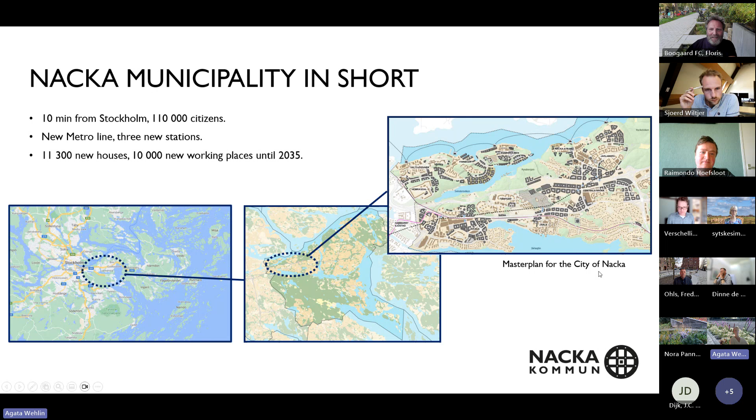And part of an agreement that the municipality made with the government was that we have to create many new houses and many new working places until 2035. And like I say, Nacka is surrounded by water. As you can see, we have over 40 lakes. And of course, we try to work with the stormwater in a sustainable way. And we have some stormwater guidelines that we are following in all our projects. In those guidelines we have both guidelines and examples for how you can manage stormwater on private properties and in public spaces. We also give clear dimensioning standards that need to be followed to secure both water quality and runoff.

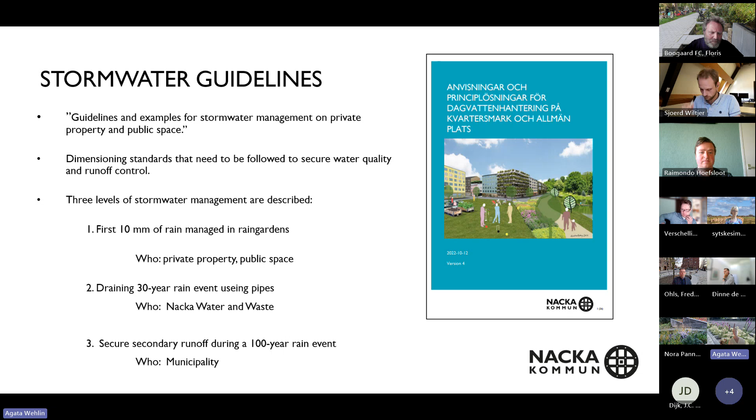And we describe 3 different levels of stormwater management, where the first level is that everybody has to handle the first 10 millimeters of every rain event through using rain gardens. Then we have the piping systems, where the utility service company has to secure 30-year rain event runoff. And then the third level, the municipality is responsible for securing secondary runoff during up to a 100-year rain event. And these guidelines are mainly used in new developments or larger reconstruction projects. So we don't have the same guidelines when it comes to existing areas and existing developments.

And when we integrate blue and green infrastructure, we dimension them to manage the first 10 millimeters of rain, and that can be compared with an average Swedish rain that is 7.3 millimeters, which means that we can treat 75% of the yearly runoff.

And as I mentioned earlier, this has to be followed both within public space and on private property. So we are following up the developers, and we are a part during the design process of public spaces. So we are there and active in securing that those guidelines are reached.

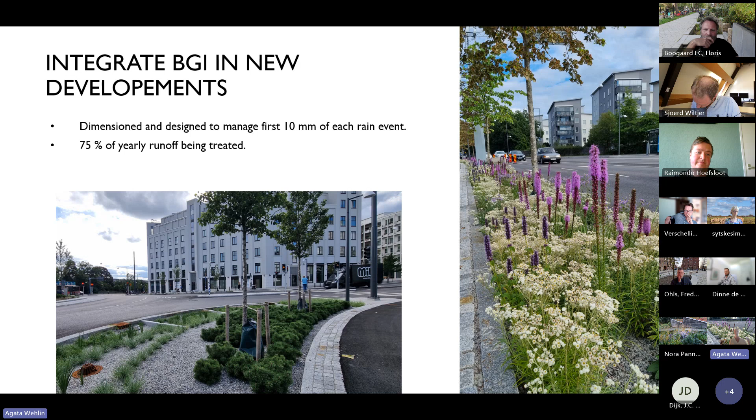And during the last years, we have tried to develop 2 types of rain beds. The first example is those open rainbeds where the detention volume has to be able to be stored on top of the substrate, on top of the soil. So we don't calculate the volume that is available in the soil and the substrate.

So we have tried to make it easy for the consultants to make the calcs, like, you have the catchment area, the runoff coefficient, and you take that times 10 millimeters, and then you have a volume on top. So we have really tried to make it simple. And the second one is this grid-covered rainbed, where we have the detention volume under the grid here. So those are quite deep, and below we have a sand filter.

And what we have also tried to do in those larger redevelopment projects where we have very high traffic intensity is to separate the water from the sidewalk and bike path. This water is drained into these airing wells, into a structural soil that surrounds every tree. So there is about 20 cubic meters of structural soil. And the structural soil consists of macadam, quite large fractions, that are mixed with the soil.

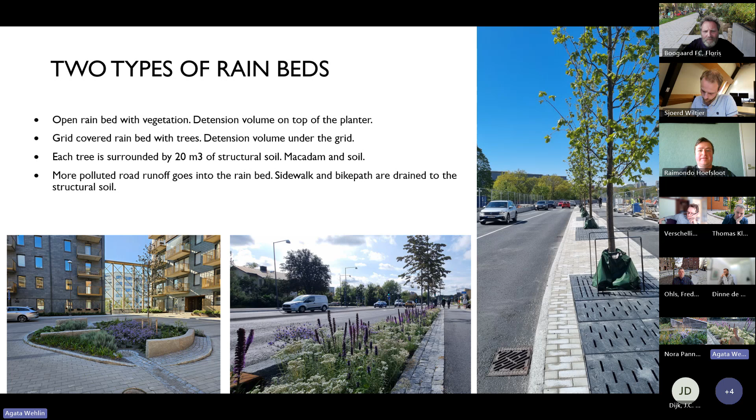And when it comes to rain gardens, we have noticed that there are many different aspects that have to be considered, and we are having different demands in each project. The inlets look different in more or less all the projects because sometimes the road has a high slope, sometimes it's flat, sometimes we can make the inlet wide, sometimes it has to be narrow for different reasons.

It also can be difficult to actually secure the 10 millimeters on the top of the planter when we don't have enough space in a quite narrow road section. We have realized that there are many different substrates and soils on the market, and they have different characteristics that bring other issues when it comes to choosing vegetation or infiltration rate or things like that.

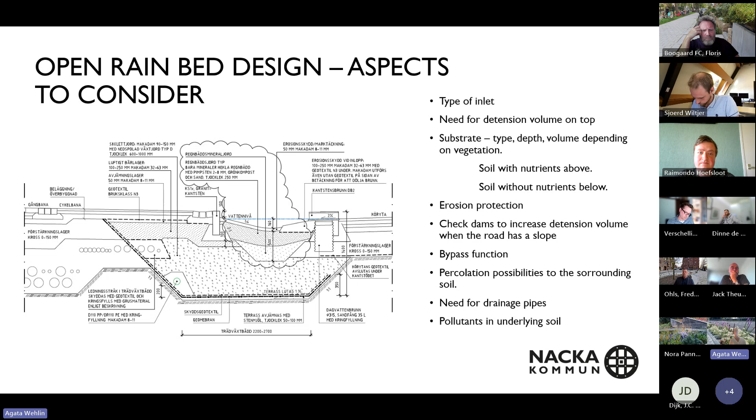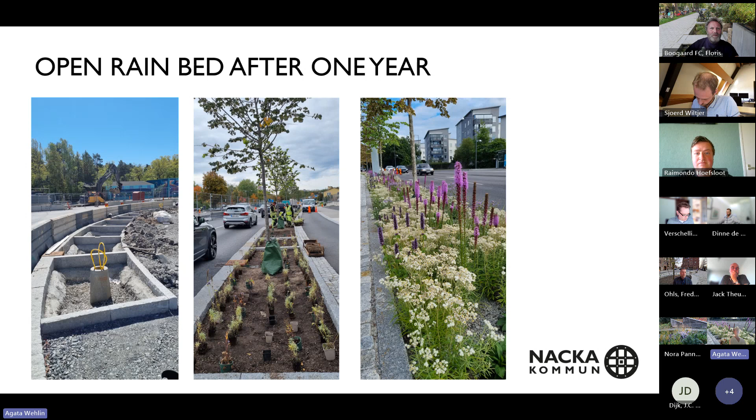And this is how a progress can look like from construction stage through planting and until we get a fully grown facility. And this is one of our main roads through Nacka with very high traffic intensity. And here you have a section of the grid-covered rainbeds.

Here you can see that there is quite a good volume available because the sand filter is quite low, and we have covered it with the grids so you can't see the sediment or rubbish and stuff that is being drained here compared to the open rainbeds. We can see the airing well where we drain the sidewalk and bike path, and the water is drained out to the surrounding structural soil.

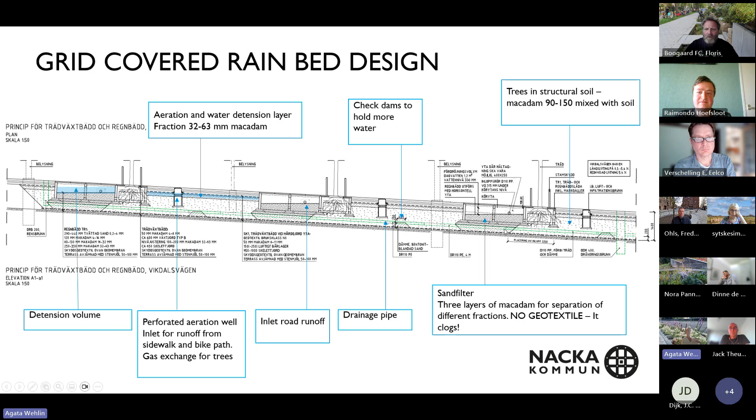You can see the inlet over here. In this project, we had drainage pipes. We had check dams on the bottom of the structural soil because it was quite a slopey road. And then we have this sand filter lying on a couple of layers of macadam that can easily be switched.

And this is how the grid covered rain bed looks. So we have the tree placed on one of the sides, and that is because we need this whole detention volume in this box. And then we have those openings so the roots from the trees can go out to the surrounding soil.

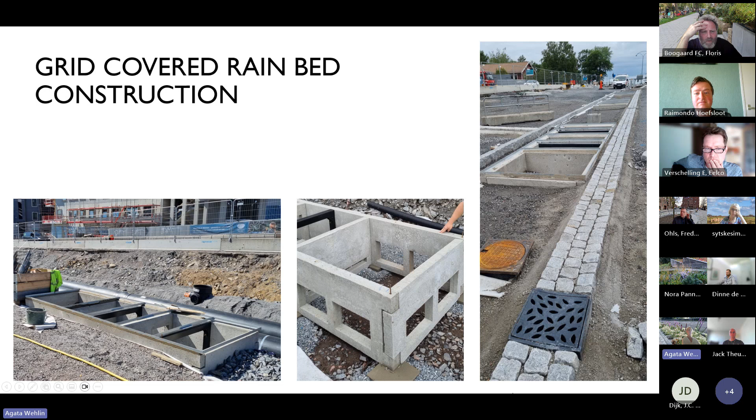And here are some examples that we have built. A comparison between those two is that here is one of our first projects. As you can see, we don't have the tree at road level. The tree is below, so that we get the detention volume, and as you can see, the crown is very low, and we wish to lift the crown up. So the result became that we put the tree on one of the ends of the rain bed.

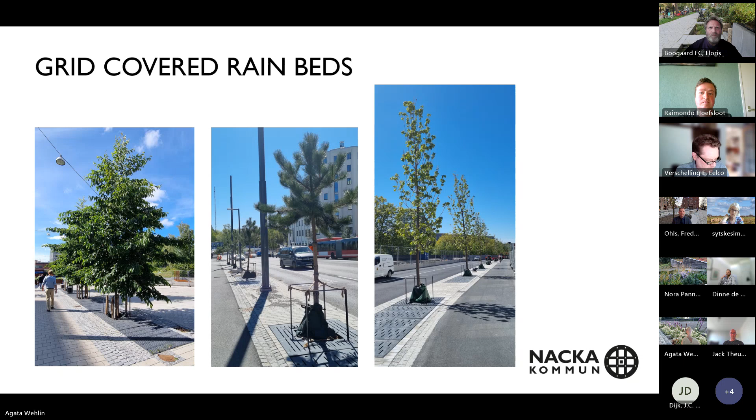So we have also done a journey during the last 5-6 years to develop those and create those better adapted for our needs. And we think that the grid covered rain beds are our favorite so far when it comes to urban design aspects, like we want people to be able to move across the furniture zone without stepping on vegetation. And we call this section the furnishing or furniture zone, and that's because we also have benches and bike parkings and other things.

And another benefit with those grid covered rain beds is that they can be made much deeper than the open ones, so we can store a larger amount of volume, which can be difficult to achieve when we have a very narrow nature zone, and we have many other functions that need space, like pipes, racks, benches, road signs, lighting.

Yeah. We have also noticed that those are much more salt resistant than the open rain beds, where we can see some damages. And our operation and maintenance personnel also really loves them because they can put the snow in the furniture zone. That was a hard word, sorry. And there is no need for lifting out the snow and transporting it to another place. It can lay down here during the whole season and drain down to the rain beds.

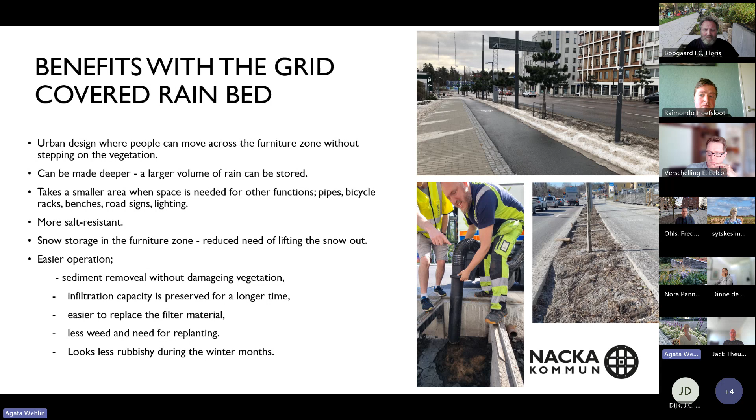And every year we have a very nice operation and maintenance event with our personnel in Nacka. And this is because we want to create engagement around rain gardens and spread knowledge. During those events, we measure the growth of the sediment. We also do the infiltration tests, and then we also remove the sediment and take sediment samples for analysis. And this is because this technique is new for us. We don't have a lot of experience from it, so we are trying to collect data to better understand how they are working and what we have to think about to make them work in the long term.

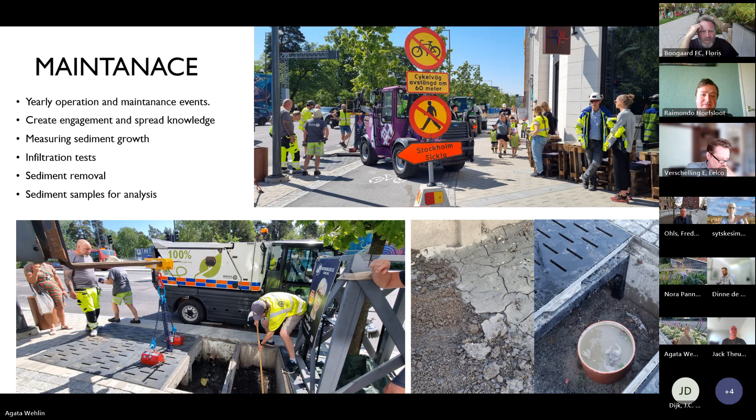And here we can see how the salt has affected the open rain beds during the winter. Near the curb here, you can see the vegetation that has been planted has died. There have actually been some natural seeds being rooted here that have started growing. So it will be interesting to see what can actually grow here.

What we also can see is that the trees are doing very well during the spring, but during the late summer, you can see damages on the leaves, which we cannot in the grid-covered rain beds. So that is something we are discussing in-house. Do we have to use such a large amount of salt for de-icing? Can we use another type of salt? Can we find other types of vegetation? Because those that were chosen for this facility are already plants that can live in dry conditions and that should be at least a little tolerant to salt.

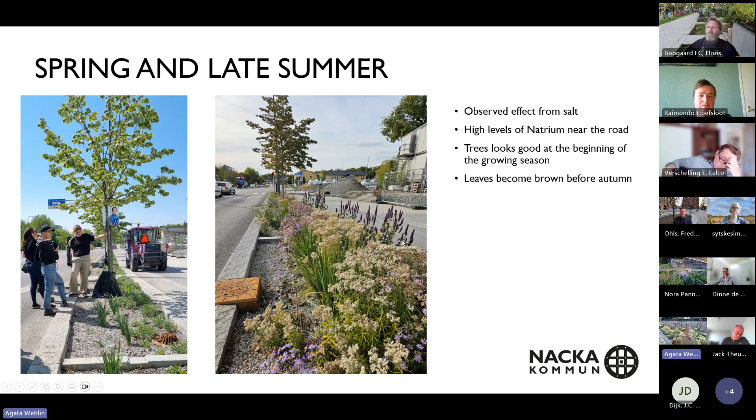So some short lessons learned. Designing rain beds can be very complicated, but it's also a lot of fun. You can be creative, work together with your colleagues, develop new details, I would say. In an urban environment, there also has to be many different interests weighted together. So it's not like I'm getting my whole wish list during the design process, but together with the other areas of technologies, we try to find the best solution in a bigger and holistic perspective, I would say.

You really have to have a multidisciplinary approach, close collaboration and communication between landscape architects, traffic planners, constructors, lighting engineers, and so on. You need to collaborate from early planning through the whole detailed design process. Also, an understanding of blue and green infrastructure and why we build them is crucial for effective and long-term successful maintenance. So engage your operation and maintenance personnel.

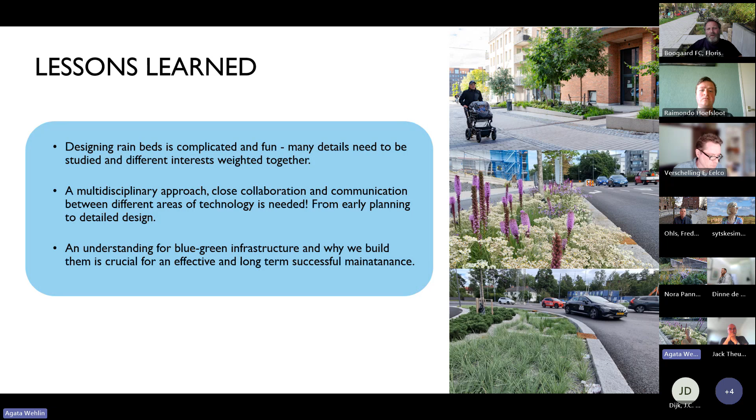Thank you. I will stop here.

Thanks a lot, that was great, especially getting into the challenges, and that's great for the Q&A afterwards. So now we go to Frederik, but maybe in between there were some questions in the chat. Shall we just do one? As agreed, we're going to do most of the questions afterwards, but maybe the macadam question from Jennifer.

What kind of substrate is it actually? Macadam is just bedrock that has been crushed. It has a fraction between 90 to 150 millimeters. We put the macadam in, first one layer of macadam, then we put soil that we flush with water so it fills out the gaps between the macadam, then we put another layer of macadam and soil and drain it down. That type of construction is very stable because it's like a road body, so you can drive with heavy traffic on it, which means the soil is not compacted and the roots can develop well.

Yes, thank you. Let's see how this works. First share screen and then... And then, yeah, we get your email now. Maybe. Good. Oh, now you have two pictures, right? Yeah, exactly. Okay, let's see. We could do it like that, but yeah. Bye, Eelco. I can do it also better like this. Okay, now? Looks good.

Perfect, looks good. Yes, I'm Fredrik Ohls, working at Sweco, a consultant company. I worked with Agata before, we were colleagues. I work with stormwater cleaning and climate adaptation, mostly detail design now, because I realized I'm going to retire in 15 years, so I need to do some real projects now, not only investigating. So I'm focusing on detail design, and half my time I'm also a local politician. I never thought that before, but I got into politics, and I am now vice mayor of a municipality suburb of Stockholm. It's a very odd combination, but it's very nice. I try to implement it the political way too.

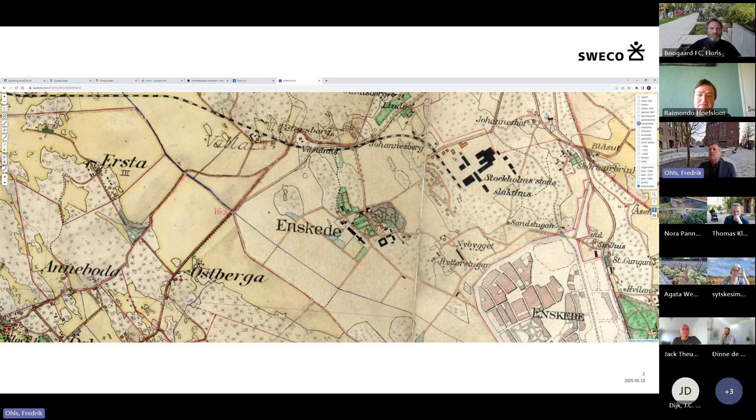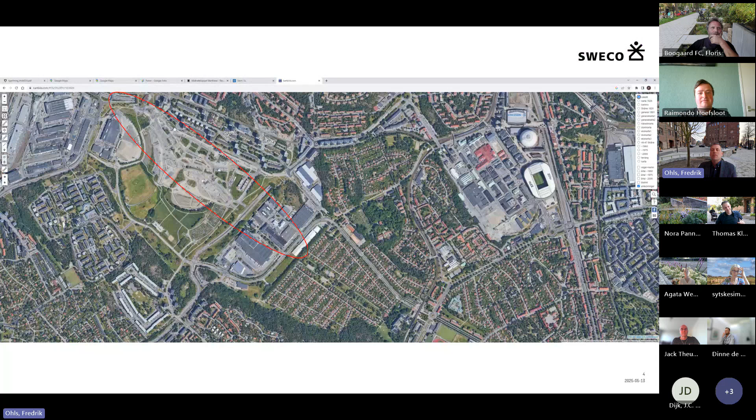Well, let's see the next picture. I work in Stockholm mostly with my projects, and this is how it worked before. It was nice for the water just going into the blue ditch, you can see it here. Then we started to develop Stockholm, and the blue ditch is still there in the red circle, but we forgot how the water flows, so we just put it into pipes. That's the problem, so now we are lifting the water back up. I just wanted to show you that to remember what we are doing. This is the Royal Seaport, a rainbed project in Stockholm. I'm going to show you a lot of pictures from different projects in Stockholm, mostly involving Sweco, but also some others.

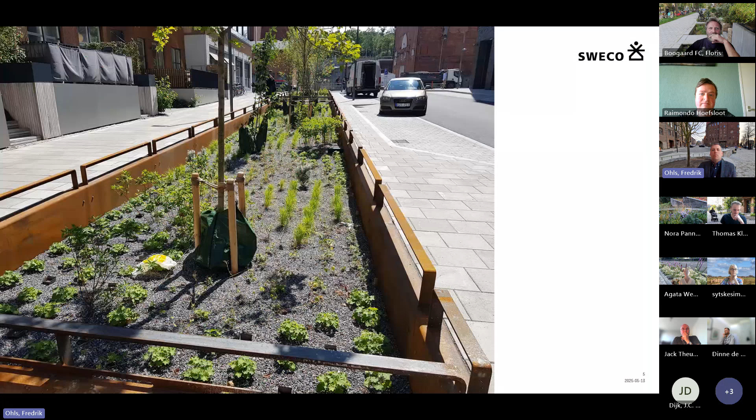This is full with macadam. And the recipe that's used until now in Stockholm is 70% macadam or sand, 15% biochar as a carbon, and 15% compost or some humus. That's the soil that can breathe and can receive water.

And we also often have a lining in the bottom. Before it was to protect from the soil that is polluted, but now it's to store the water because there's a lot of dryness going on.

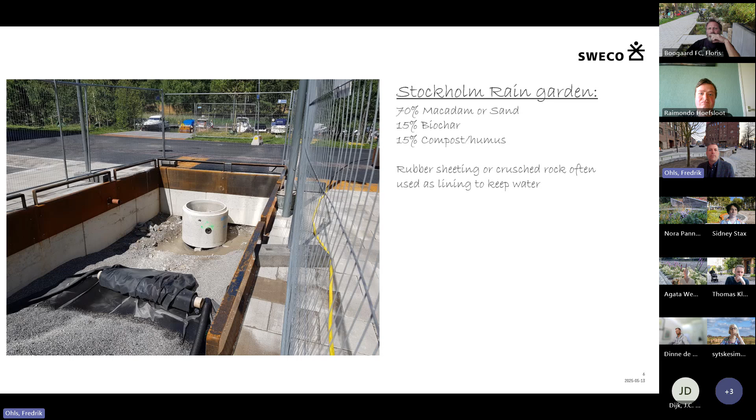And I have a film, maybe you've seen this on LinkedIn, some of you. I think Thomas has seen it. This is how it looks like after 50 millimeter rain. It's still working very fine.

In Stockholm, we have a design criteria of 20 millimeter. But I think it's the same as Nacka, because we can allow ourselves to have 10 millimeters slipping away, and then 10 millimeters can infiltrate. At least my calculations look like that. Sorry about that.

But this is another rain garden in Stockholm. I also have a film of that one. And it's very tricky, so it was slipping into the road body.

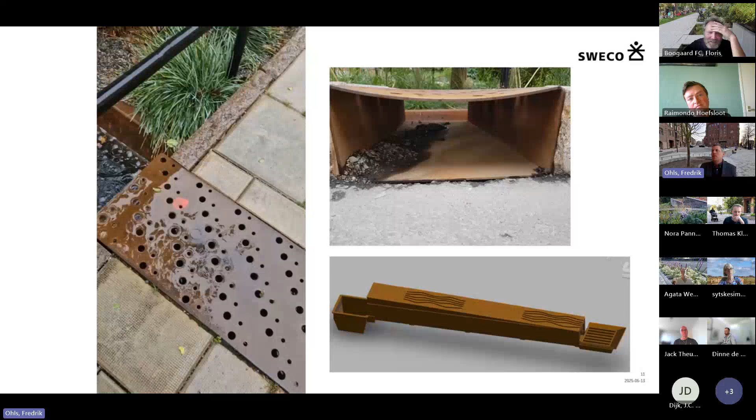So we developed the one at the new inlet. We are trying that now, on the bottom right, with a pattern that is the Stockholm official pattern of stormwater inlets, the waves. It's interesting - if it works, it will be a success, but if it doesn't work, we will find another pattern. I hope it works. This is on its way now to be implemented.

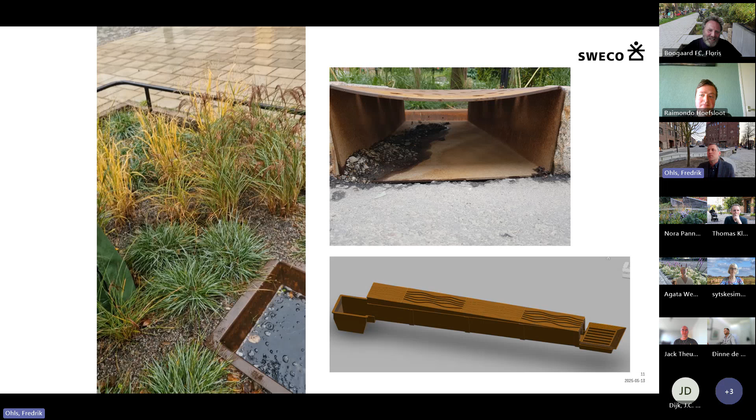And as Agata showed, this is the way Stockholm does it. We do the same as Nacka - we invented the wheel at the same time, I think. But we also have some people going from Nacka to Stockholm and vice versa. So this is the Stockholm way. The blue is the inlet underneath.

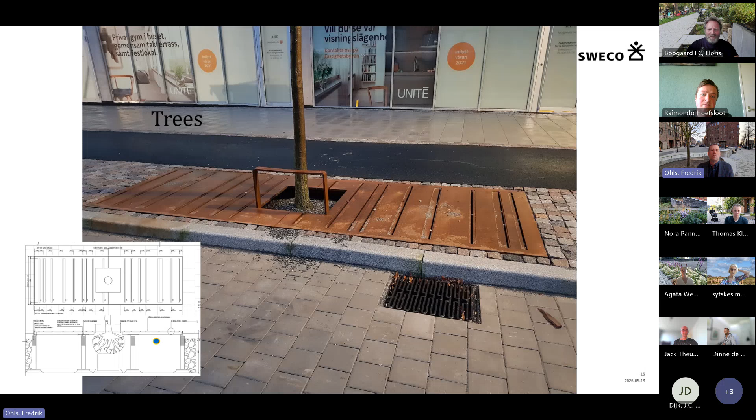And we also have this invention used in Stockholm: we have a lot of impermeable area, but we just make a hole to the macadam layer with a stone under the pavement, and then the water can enter here. It works really well and is implemented everywhere in the city.

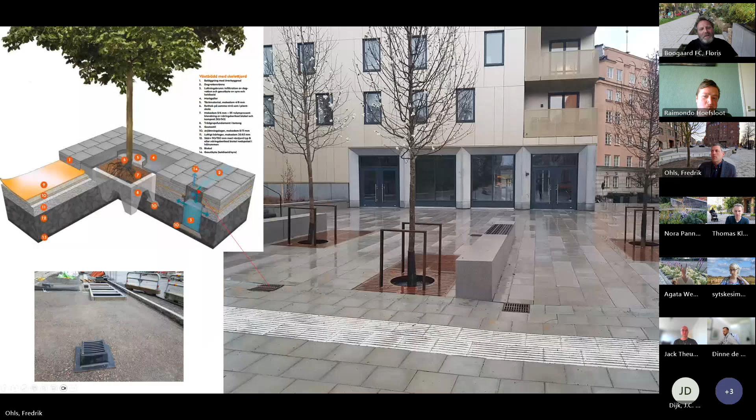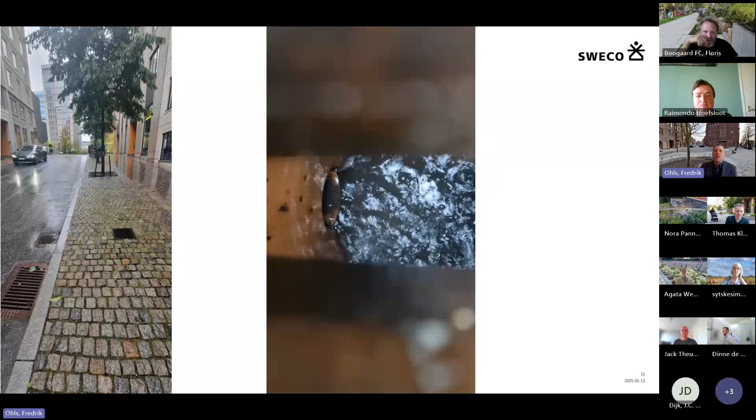And okay, I have another film of how it looks like when the water is coming in... This is how it works in Nacka, but this is in Stockholm - it's the same, it just goes through a pipe and comes out. This is very small, but it seems to work also with small boxes.

And you see, this is an inner city place in Stockholm. And we have another extra - this is for the trees, and this is for the pipe system. There's a redundancy.

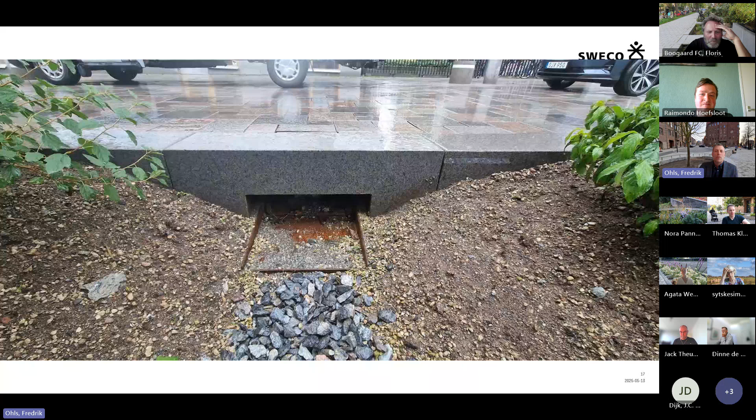And it also looks like this in the inner city of Stockholm now. We have parks that take a lot of stormwater using the slope to the park. A lot of invention of how to get the water - that's the tricky part, how to get the water into this and to get good cleaning.

And Thomas promised you no wadis, but I will show you a wadi. This is water in the Royal Seaport. Just to show how this macadam soil really infiltrates and filtrates very well, because here is the pipe outlet, but there was no water. This was 50 millimeter rain, and the Baltic Sea was then cleaned.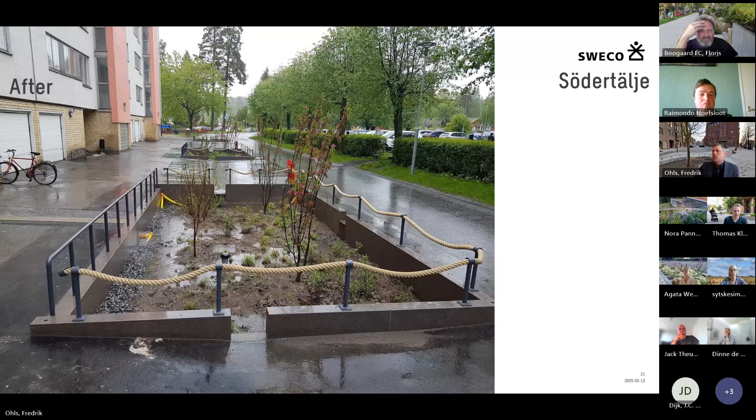And another project before looked like this, and after we dug 12 holes. We tried it the same day when it was 50 millimeter rain - this was 40 millimeter because I filmed this before Stockholm. It's the south of Stockholm. We have removed the pipe from the cellars just out here, and it stores very much rain. Before it was on the ground, now it's in the ground.

And it's beautiful. Problem here is sand, and we also use pumice, and it really grows too much. Pumice is a volcanic ash from Iceland, so it's not so local. But it grows too good here, so the weeds love it here.

So yeah, I will go. I was there one year ago. It was establishing a lot of weeds, but maybe it's better now.

About maintenance, we as consultants go there, but we are not allowed to be consultants during that phase. As Agatha can work also in the municipality to check how it works. We do some projects and then we are done with it. So we have to go there and establish ourselves.

Okay, this is courtyards in Stockholm. Very easy actually to take water and infiltrate it if you just keep some trees and make a good elevation. And some problems - this on the right is the problem I see everywhere.

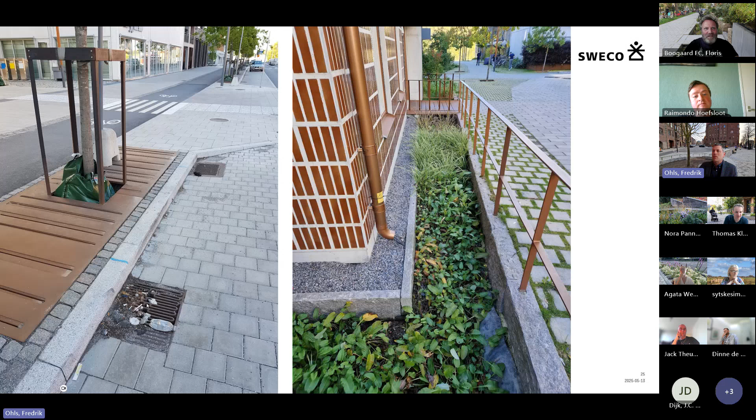I will mention also the concrete slab that takes a lot of space, and I want to give you some alternatives.

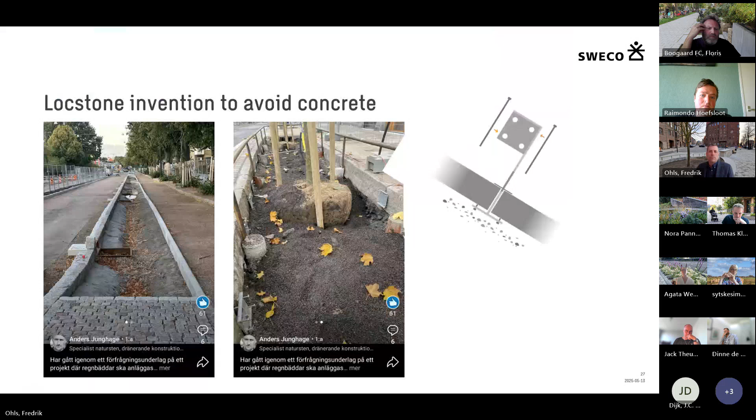We have an invention, I have not tried it, but it's found on LinkedIn. It's called the Anders Junghage Locstone, and I think it could be interesting to try. You see on this one you have a lot of concrete taking the space. On the right you don't have any concrete, but you have a metal stuff that you drill into the asphalt and then put some asphalt above it. So this will be tried for sure.

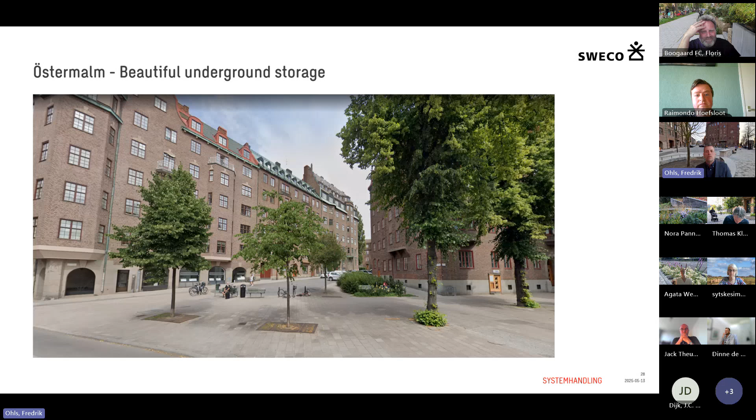And I will finish with some projects, the latest projects we have, that is about to be inaugurated in the coming weeks. This is in the inner city of Stockholm, where we are trying to do some water buffers because we want to avoid heavy flooding downstream. So we store the water upstream in the catchment area in the existing city. And that's why we have to not only do some ugly stuff, we have to do very, very beautiful stuff, so we get finance - so we do a better park or a better square.

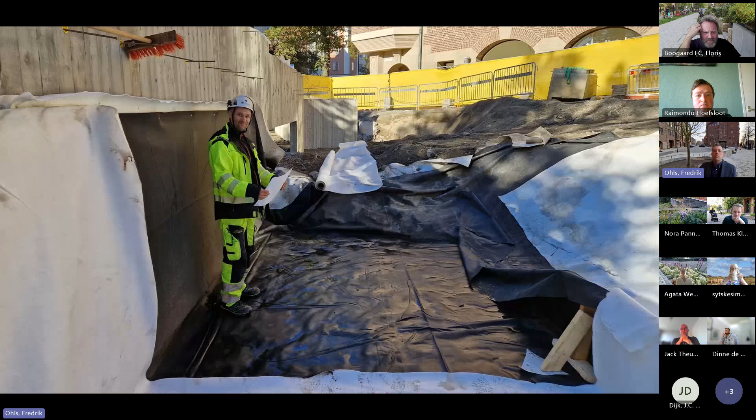So this was the idea of this green catchment area: to store the water underneath, and also make storage under, filled with stone or filled with plastic cassettes with a lot of space. And it looks like this, with the entrance of the water, communication here with the other system, and also a lot of the red is inlets - a lot of inlets going together.

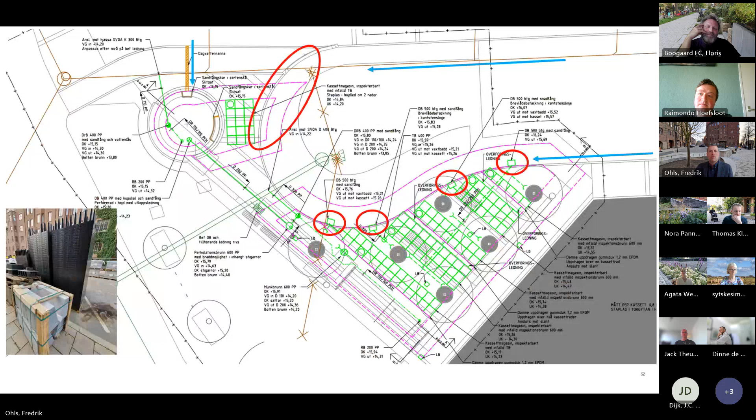Very complicated. When you don't do a rain garden, it gets very complicated - that's what we know. If you do an open solution, it's much more easy to construct. But this is also, as Agatha mentioned, better for the maintenance. It looks like this underneath.

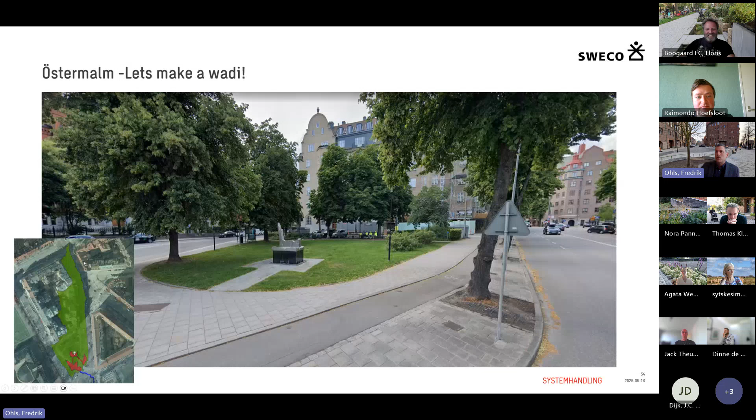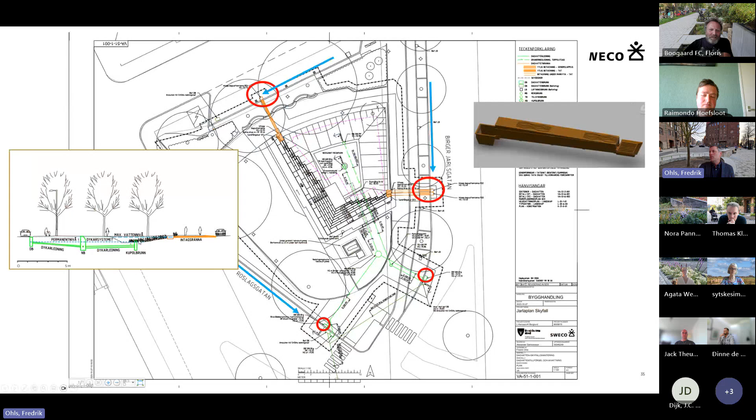And another - let's make a wadi here, another catchment just beside. Here we do one, and here we do another. We use these new inlets to take the water from the road into the wadi, and to make it very, very beautiful, to look like a creation that looks like the inner city of Stockholm, to adapt it to that architecture. We use the inlets and also communication of the water body - the water here communicates at the left, communicates with this one. So we have actually four different inlets.

Looks like this has been a bit developed. We have an inauguration on Monday to check it - I mean an investigation - and we have a lot of roots. So in existing areas it's problematic, but we have a lot of roots and a lot of pipes. Just wanted to show some pictures of this, and yeah, that was my last picture.